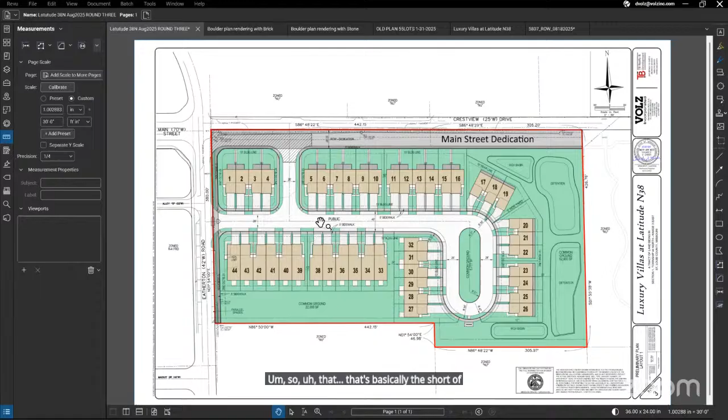That's basically the short of the plan. The right-of-way is 40 feet. The pavement is going to be a standard 26.1 feet wide with sidewalks on both sides.

I'm going to let William talk about the structures that are going to be built in the renderings that we sent. But did you have any... you know what, I'll let William talk and then we can answer questions. Thank you, go ahead William.

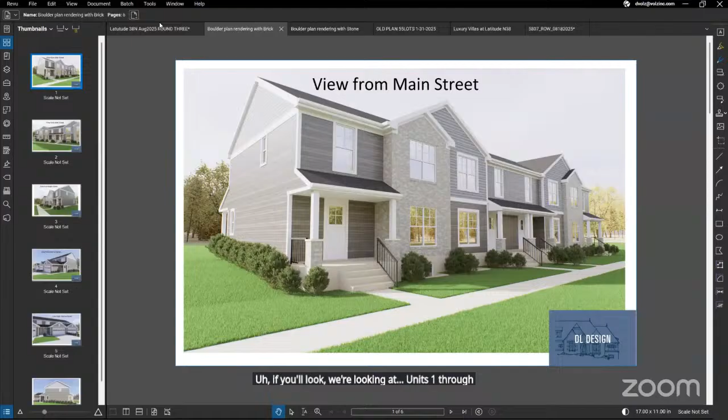Good evening, everyone. Thank you for the opportunity to show you our revised and updated plans. We're looking at units 1 through 16 on the plan. So if you were standing on what could be a future Main Street and looking south, this is what you would see. We took into account the town center design manual preferences, elevated porches, rear entry garages, etc.

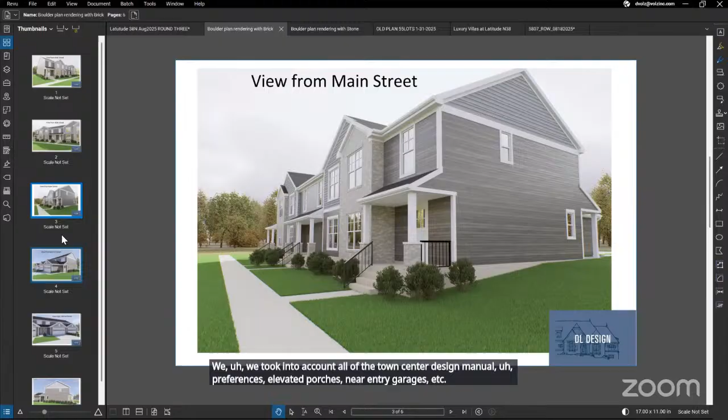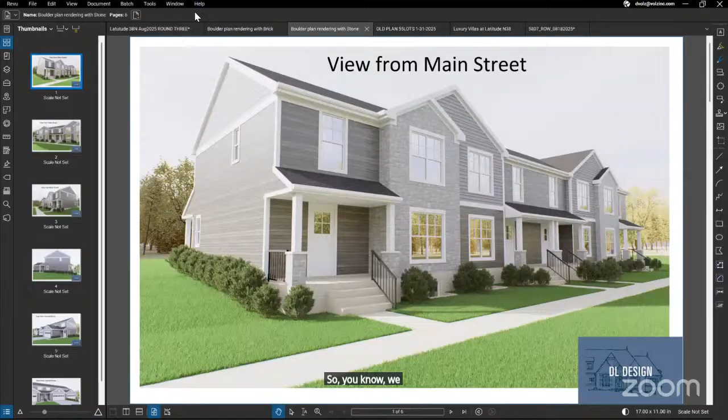We have stone and brick elevations with cementitious siding, as well as some shake materials up in the gables. We do recognize that the city has an architectural review process, and we know we'll be going through that after zoning, so we're open to their comments and incorporating those. We just wanted to let you know the level and quality of materials that we have planned for these units.

This would be the view from the internal street. Correct. Internal street again.

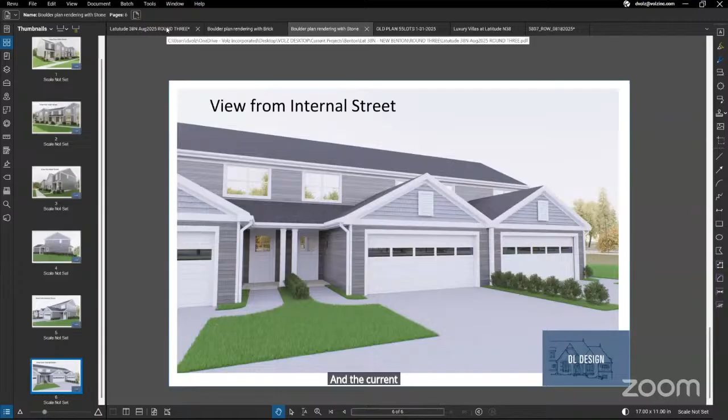The current plan has 44 units total. 12 of those are ranch units, the rest are 2-story units. The ranch units will be 2-bedroom, 2-bath. The 2-story units will be either 3 or 4 bedrooms, and 2.5 or 3.5 bath.

These would be the ranch units, 33 through 44, and the 2-stories would be these right here. Correct, and I believe these are on slab, and these have basements. Correct, and we intend to finish the basements in half of those units. How many total basements can you have, 30? It would be 32. 32, thank you.

All right, is that all for your presentation? That is all I have. Does anybody else from the development team have anything to add?

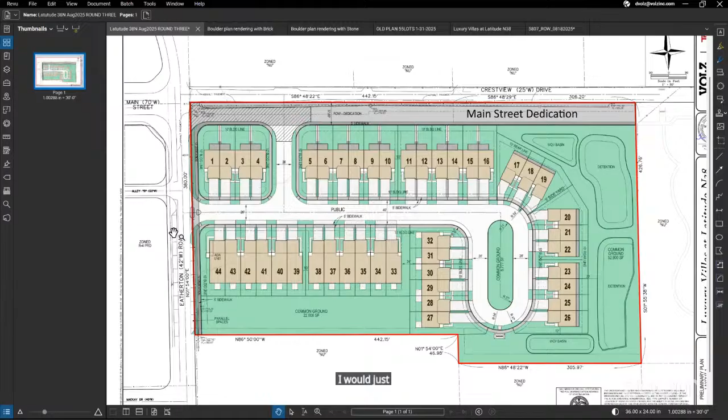I would just say that along Eatherton Road, what we're proposing is the same as what we had on the other plan, with the parallel parking spaces right here. So the design and plan for both Main Street and Eatherton match what we had always proposed, which allows a connection through to the park with the appropriate amount of right of way that you would need.

I had a question regarding whether there is a fence line along the south side of the property, between the property line and the adjacent homeowners. Last time there was a sticking point related to potential light disruption from the cars in the development, to have that fence over there. Do you guys have something like that in there?

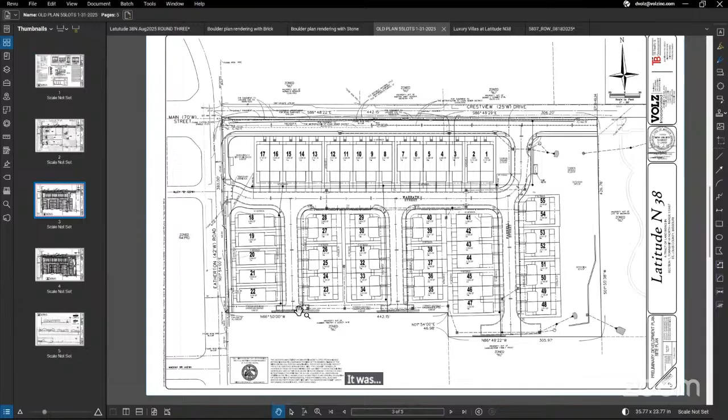We're not showing that at this point. Fortunately, there's no drives that come down here anymore, so to the south there's more than 100 foot of separation. We also will have to do a landscape plan at some point. But the need for that fence, which was basically right at the end of that stub street, if you remember, they were right here, that was so when a car came down it would block the headlights. So there's really no need for that at this point, unless the developer wanted to have a fence.

I'm just looking more over here at the Circle Drive on this end, because there'll be cars coming down and stuff like that. I'm just honestly trying to come up with, being the devil's advocate, things that I can hear will be brought up by other people. Sure. I supported the last plan, so obviously this one's even better when it comes to density and some of the concerns other people had. I think the elevations look good and the layout looks really good to me. I'm just trying to come up with things that may come up in future discussion.

Right, thank you, Councilmember. There'll be a landscape plan, and we can plant landscaping here, and you could put a little privacy fence here. It would be a short one, or just wrap this with some type of landscape buffer. There's plenty of room because this is over a half an acre over here, so you have another quarter of an acre of ground here plus all of this.

Could almost build up the land along the edge there and put some trees or something. You probably could. I do need to get this drainage down and into this basin, but you probably could do some type of a berm here.

Okay, and you could probably do a berm in here as well. We do prefer to screen with berms and landscaping, but we're not opposed to a fence. Berms and landscaping just tend to age better over time and look better, but we're open to that.

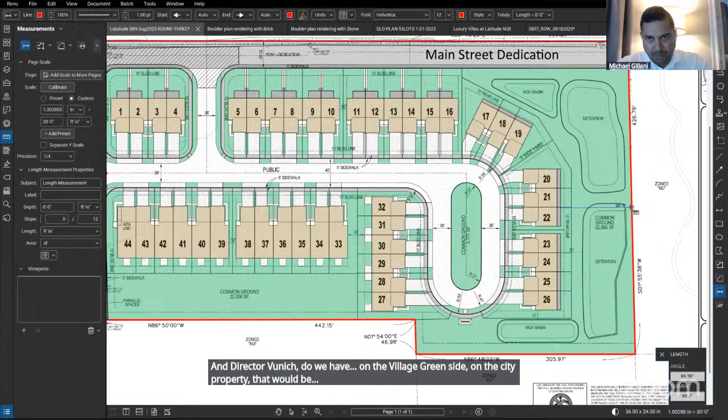And Director Vunich, do we have on the village green side, on the city property abutting the west side of this project, a tree line that's going to be in there between?

Isn't that right where the unlimited playground's going to be? Mr. Gilliani, the unlimited play facility will be just to the west of the westernmost edge of the oval. This area over here next to the development originally showed the observation tower.

But that's been removed. So for the most part, we probably have a trail network through there, but other than that we are not anticipating a lot of disturbance or tree removal there. So my point is there'll be a pretty good buffer with the trees that already exist that we won't remove.

And then potentially some trails in between. So it's not like there should be an issue there then. From the department's perspective, that's probably one of the areas where we'll have the lightest touch, so to speak.

Okay, it's probably 200 feet from the back of these units to that sidewalk right there. Yeah, so I think it's good because you'll have the oval of Village Green. I know I'm just bringing up points that people who are against it will try to bring up.

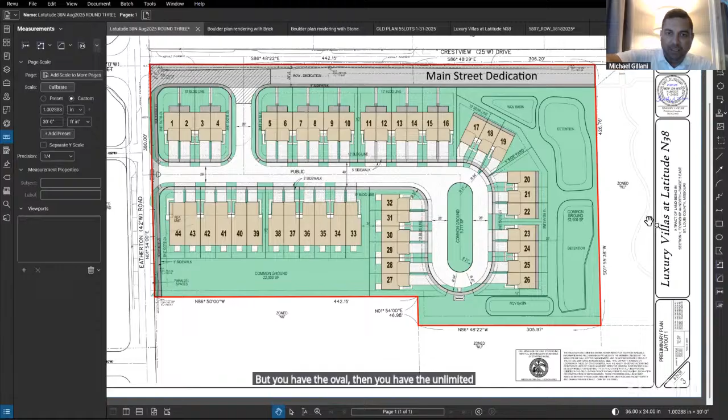But you have the oval, then the unlimited playground facility, then the tree network with potential trails, so you won't be able to see from Village Green - you won't even really see the development. I don't know what the existing trees are here, but it's pretty far away from where anybody would walk.

And like I said, we have to do a landscape plan. Previously we had a drive back here, if you remember, at one time - that's now gone. Now these are different types of units that are more shallow, which gives us more room for the detention basin. This was an entirely walled basin. So we've made many, many steps to make this a better and better plan.

Would it be possible to get a sidewalk connection from the south end of the circle over to the Village Green? You mean from here through here? Well, I was thinking the southern end of the circle. Yeah, that's just my thought, for connectivity - because if you live in lot 25 or 26 and want to go to the Village Green, you have to walk almost all the way over to Etherton and then come back.

Sure, I'm just trying to promote walkability here.

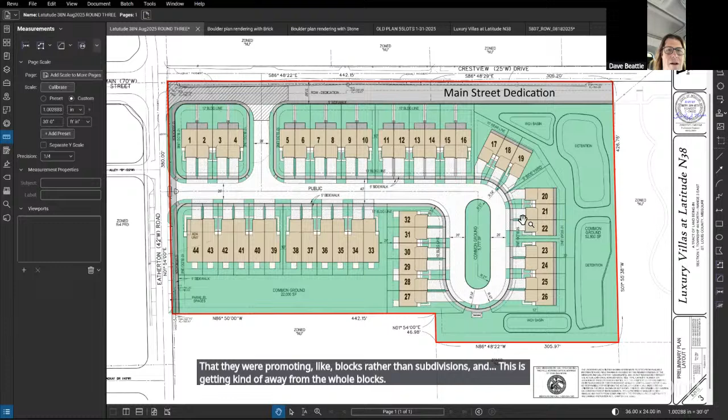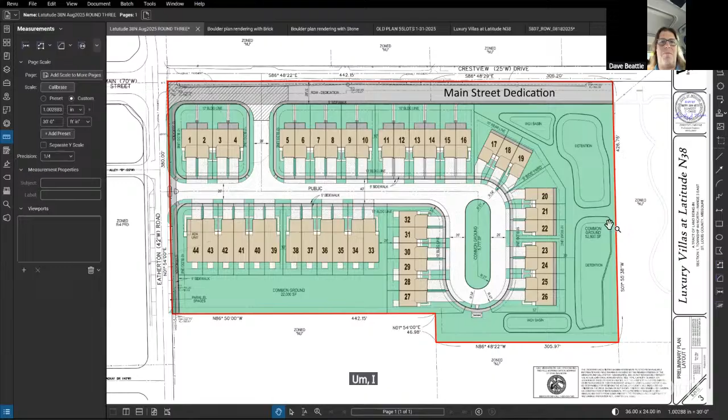Personally, I live in the town center. I liked the idea that they were promoting blocks rather than subdivisions, and this is getting kind of away from the whole blocks concept. But given the land, you only have a few properties here rather than a wide open area where you can really zone several blocks of development. And previously, I know the neighbors have spoken out against a lot of connectivity, which I don't agree with, but I'm only one person. So that's why I'm looking for sidewalks at the very least.

And then, along those lines, why is that street from Main into the subdivision so close to Etherton? Why did you put it there rather than, say, between lots 10 and 11?

Well, a couple of reasons. One, in meeting with the planning staff, this is where we all decided it could go—it could go anywhere along here. The development, I think, is going to build this much of the road. Previously our entrance was way down here, and this community was going to build all of this. But because we lost 11 units, the funding for building the road all the way down to here is gone. So this is what this community can support. That right there is about 200-some feet of Main Street. Main Street, what we're proposing, is a 24-foot drive, so you'd have a lane going either way with a sidewalk right here. That would get you to right here, and hopefully the city will build the rest of it down to the park.

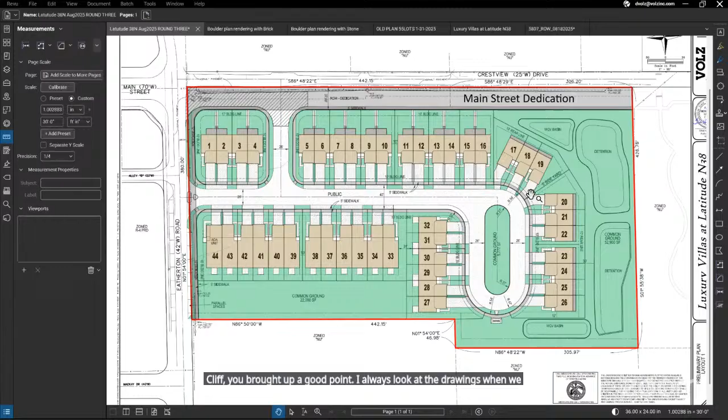That's fair. And then Cliff, you brought up a good point. I always look at the drawings when we see proposals and look at how parking is going to be handled, because that typically seems to always come up. I do see that there are 2 spaces in front of the garages, which what we sometimes end up finding out is that people don't use their garages. They fill them up with storage items, not all of them, but some, and so they use the pavement in front of the garage as their parking space. So my number one thing I'm looking at here is what happens if someone is having a graduation party on a Saturday afternoon, where are their guests going to park? And I'm looking at the street here, and I think it is 26 feet wide.

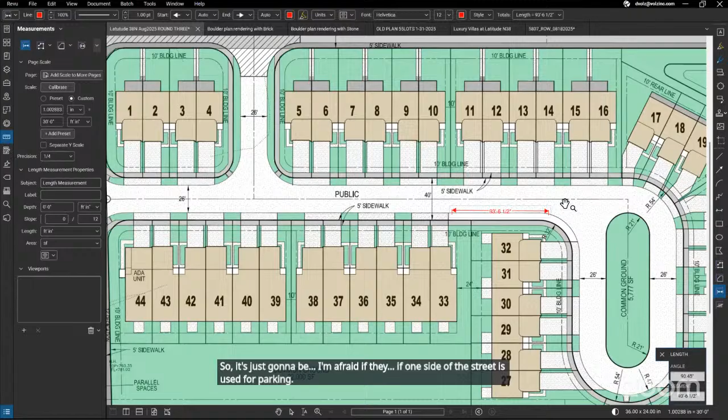So Director Vunich, 26 feet, what does the fire district tell us? Is parking allowed on that street, either side or one side, or no parking at all? Mr. Mayor, Mr. Volz described the street width as 26.1 feet in width. That allows parking on one side under the fire code. But in this instance, with the garages and driveways in such close proximity, I don't know if you'll be able to park any vehicles other than that one location Mr. Volz described, down by lot 32, and then in that elongated area. A typical parallel space is generally about 8 feet in width and 20 feet in length. So I'm afraid if one side of the street is used for parking, it's going to negate safe access into and out of the driveways.

Yeah, I think that's where I'm seeing an issue. I'm not a fan of having parking just on one side or no parking at all, because we have these issues elsewhere. So I think my feedback for you guys is you need to come up with some ways of accommodating visitors. Otherwise, you're going to have to prohibit people from having visitors, because where are they going to park?

I don't know, so to figure that out and see what you can come up with—unless you think you have an answer now. Do you want to comment on that now? Sure, I can comment on that.

The spaces right here, I think you could probably get 3, and they wouldn't be on the street. I would actually do it like we did over here, where you'd pull off and then come back on.

So I think you could get 3 here. If you can give me some feedback, do you think there's room to put a row of parking in here? Would that be something you'd want—trade off the green for the parking?

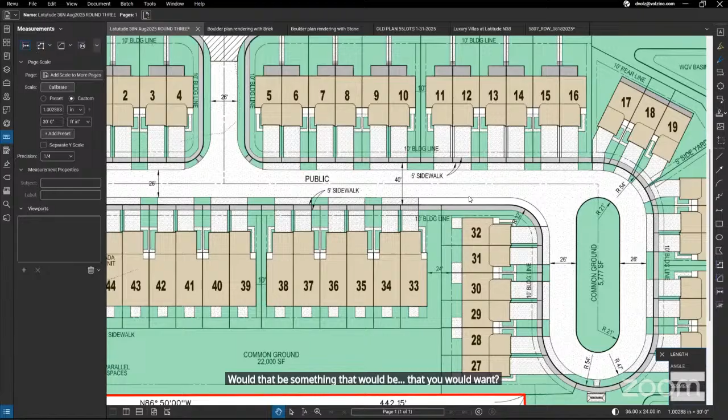In fact, you could probably get a row on both sides. You could probably get a row here and parking here. You could make that parking.

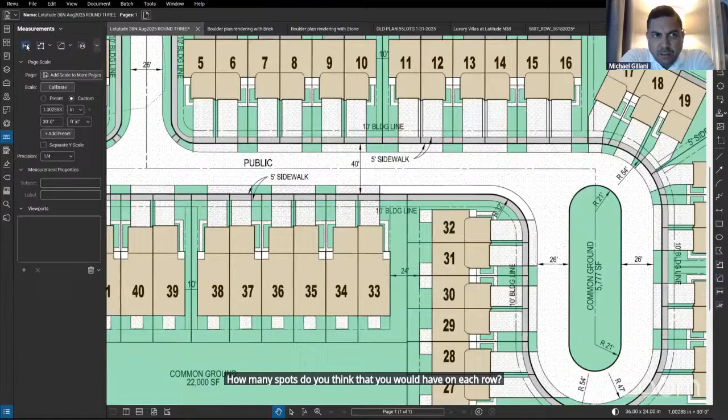How many spots do you think you would have on each row? Well, let me see here. So those would be 9 feet, so you might be able to get 10—you might be able to get 20 spaces, 10 on this side, 10 on that side.

And you're trading in then that common ground area that's in the middle. Yeah, and maybe that's too many, maybe you don't need that many. Maybe you just do it on one side.

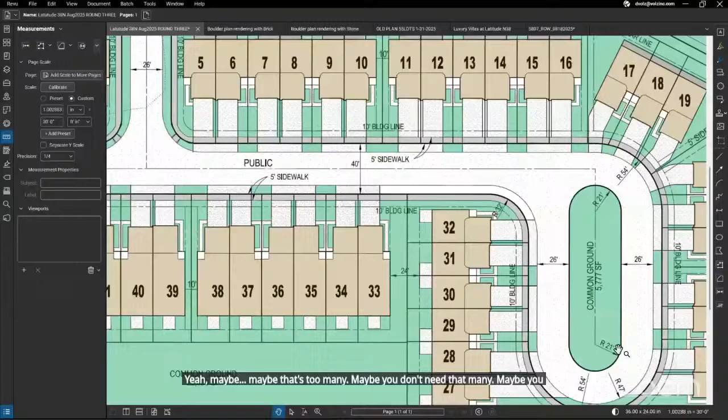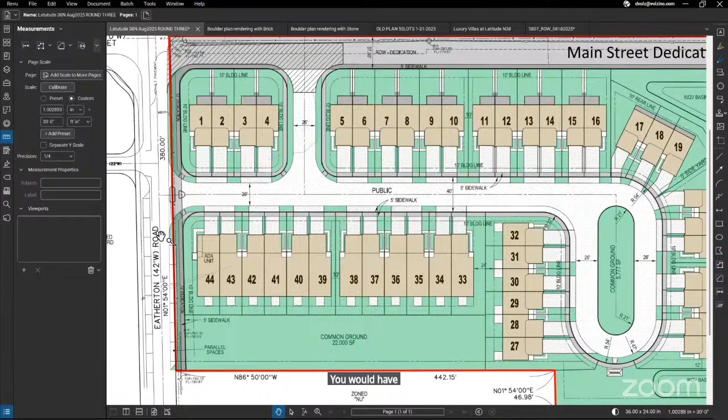And that would be the visitor parking—you'd have to let everybody know that's the visitor parking for the community. There's also parking here along Eatherton Road—I think there are 1, 2, 3, 4, 5, 6 spaces here, which probably would be available. I don't know whether these spaces on the other side are used by these homeowners, but you would have these spaces available right away.

I wouldn't want to put one here because I don't think there's enough room to come in and put one there. That would be just one off-street parking that would be in the way. So I would say you could put 3 here and plenty over here.

Well, let me ask this question, Director Vunich—don't we require a certain amount of space for a proposal? And if that were to be pursued, trading in that common ground in the middle, does that affect the space requirements that I believe we require? You follow my thinking there?

Yes, Mr. Mayor. The zoning ordinance, in terms of parking for dwelling units of this nature, requires 2 basically enclosed spaces, which are the garages. And as you noted, oftentimes those become storage units. From the department's perspective, we depend on the driveway, the apron so to speak, for the additional parking.

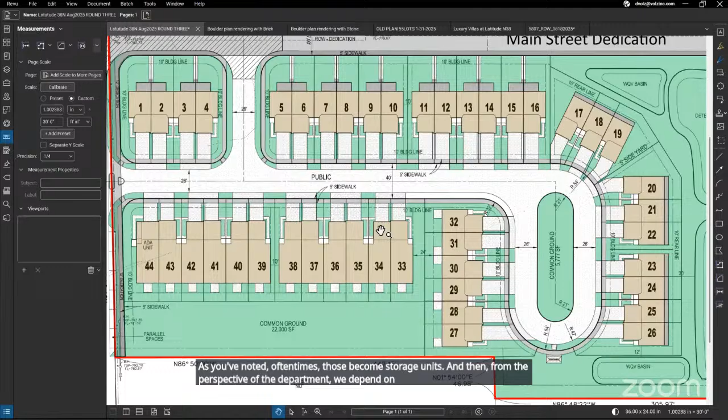Mr. Volz mentioned that an elongated cul-de-sac could be one way—we could narrow the street a little, it could go down to, I think Mr. Brown knows better than I, 15 feet. We could increase the common ground area so we could add parking and still maintain a reasonable amount of green space. Yeah, that's what I'm thinking.

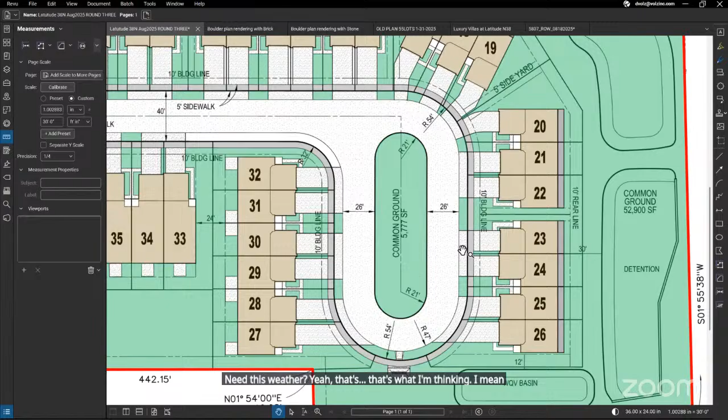I mean, I think I have to process that just to kind of see what that would look like. But I'll leave the feedback here that, yeah, I think parking needs to be figured out, because I just want to make sure that as we're proposing—and I've said this in previous proposals and other parts of the city—we can't continue to create unrealistic situations when it comes to parking.

We have that situation today. You've got it in a couple different areas. And after that, we're stuck dealing with an issue that we can't move the street. We can't make it wider. We can't do that.

And I think that needs to be just looked at there—figure out how you're going to accommodate when people have some guests over, unless you specifically put in the requirements that you're not allowed to have guests, which I don't think is realistic.

So, yes, Mr. Mayor, just a couple of thoughts. The most problematic development I think we have relative to parking is Canberry, particularly the addition that was done. That's exactly what I was thinking of. Yes, Canberry there—I know we've gotten calls over the years, and there are cars parked in the driveways and street parking there.

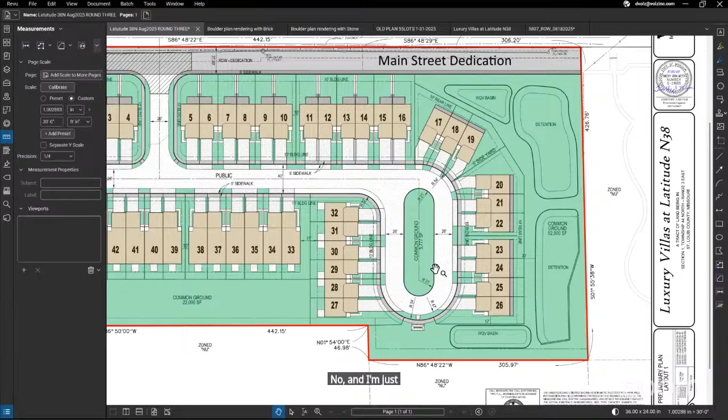So go ahead, Joe, I cut you off. No, I'm just saying what we find is some of the larger vehicles, like pickup trucks, partially block the sidewalk. And I think when we were looking at that particular project, that was coming off years and years of laying idle, with the vacant ground not being cared for well.

We were advised by McBride Homes that the type of unit generally is for empty nesters or single professionals, generally not as many families. So I think part of the discussion on this project is what demographic would be interested in renting these units. Are there a lot of families with teenagers? Are there a lot of visitors to these units? We need to balance the parking against the demographic. We've required additional parking outside the units because of circumstances we discovered in Canberry and a couple other locations.

So your point, Mr. Albers and Mr. Mayor, is well taken. Thank you.

My question is, Director Vunich just started referencing it, but what's your plan? What are you marketing this towards? Who is your target audience? Tell us a little bit more about that. Will, can you address that?

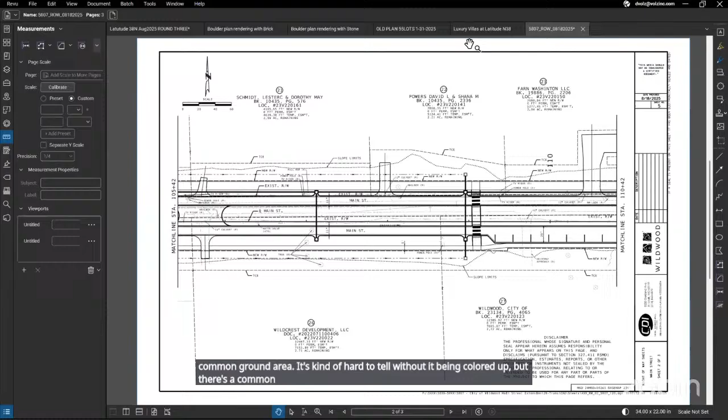Sure, can I address that? Sure, yep. As you know, here's the plan which you had sent to us—it's basically two lanes, both directions, and I think this is a common ground area. It's kind of hard to tell without it being colored up, but there's a common ground area in between. It's a great plan, but the problem is, I believe, and correct me if I'm wrong, that you need the right of way from the north in order to make that happen. That could take some time because I don't think that right of way is in place right now.

So what this is, you can call it an interim plan, you can call it whatever you want, but it gets you a 24-foot piece of pavement without having to get any right of way from the north. And it allows you to get your road from Main Street all the way through the city park and all the way to city hall.

I think I see what you're saying, what your plan is, and I would call that your ultimate plan. But I think that's a long ways off because I don't think you have the right of way or the funds to do it, but maybe I'm wrong. But doesn't that require getting the right of way from the north?

Well, it does, but as I sent you, we have right-of-way plans that'll be completed within the next month or two, and I think we have funds for right-of-way acquisition in our budget for 2025. So I think what I'm trying to tell you is that's the path we're headed on, unless council tells us otherwise, that we can be in a position to acquire easements and move forward with construction of Main Street. I think that should be the plan, to try to incorporate it essentially as best we can with your schedule potentially. And I think that's actually quite feasible.

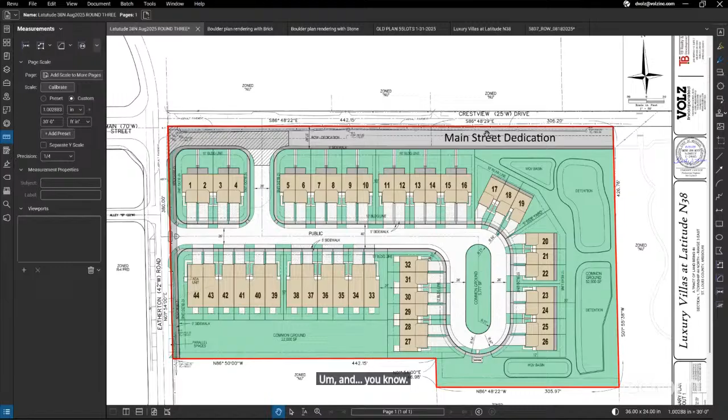And you know, if you want to build something different, I don't know what to say, Rick. Well, I think we may need to meet and kind of talk through this further, but I think we can certainly hash it out, but it probably does require a little further discussion.

I mean, that would be fine. I would love to do that. Like I had said previously, you can put this access road anywhere you want. But the further you put it down, the more of Main Street that you're building that doesn't match your ultimate plan that you would like. But I'd like to hear more about your timing and what you have in place to do that, because it appears to be a long ways off after the McBride people fell off.

Well, if you don't mind, Chair, if you don't mind if I jump in here. Go ahead, Mr. Lee. Thank you. Just wanted to note too that we do have monies budgeted for the project. We would require right of way on the northern side.

That said, when it comes to getting the project done, I'm seeing it's you said 24 feet of pavement up there, Mr. Bowles? Correct. So in that case, is there a way that could be cut in half and then you'd stretch that downward towards the east? And then we would be building towards our original plan, the ultimate plan, I guess, and at least building out that eastbound lane.

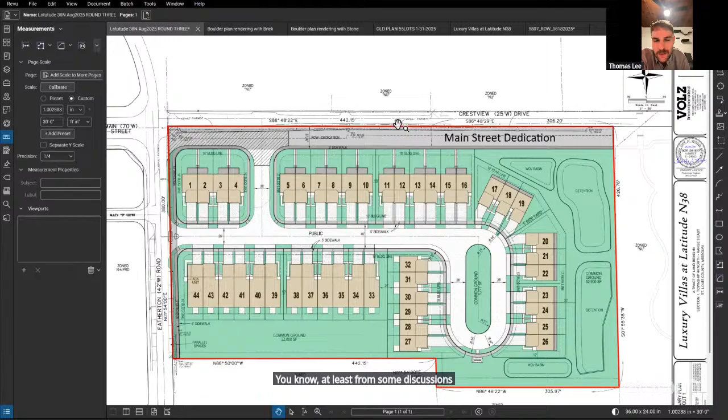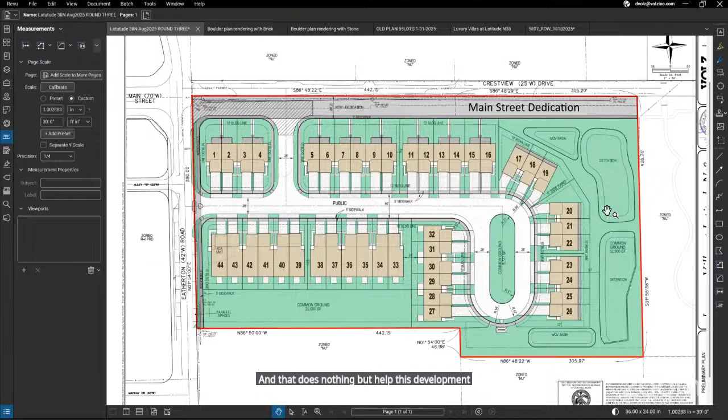I think, from some discussions at the most recent economic development meeting, it seems like the council's very adamant about getting something with Main Street done, especially with the playground going in, proposed playground going in as well. It just seems like we're going to have that issue, and we're going to have a lot of traffic coming that way. So there's going to be a push, I would assume. And that does nothing but help this development. That's why we want to give the 37 feet. We want the road to go through.

All right, Councilman Marshall? Yes. Two quick questions. I would agree with the mayor. I think you need to get your sidewalk away from the water retention and back up to the sidewalk, so you don't have kids getting strayed over to the water retention area. As nice as those are supposed to be, kids love to go in there and try to figure out what's going on. So with the park being there, I would try to get a walkway back up to get onto the Main Street walkway instead of any kind of cut throughs to the park.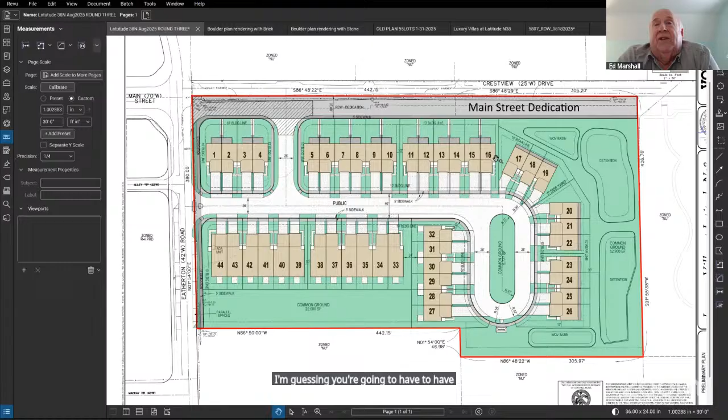The second item is, and this only happens because the U.S. postal system won't deliver to these individual houses, I'm guessing you're going to have a kiosk for your mailboxes someplace. That is true. And I think that's what we're showing right down here. So once again, across the street at Brightleaf, where the mailboxes are, there are also parking area there. I don't think the postal system will do anything as far as home deliveries anymore. Everything they're doing now seems to be in the kiosk. So just to see if that's where it is and that's big enough for everybody, that's great. Those were my questions. Thank you.

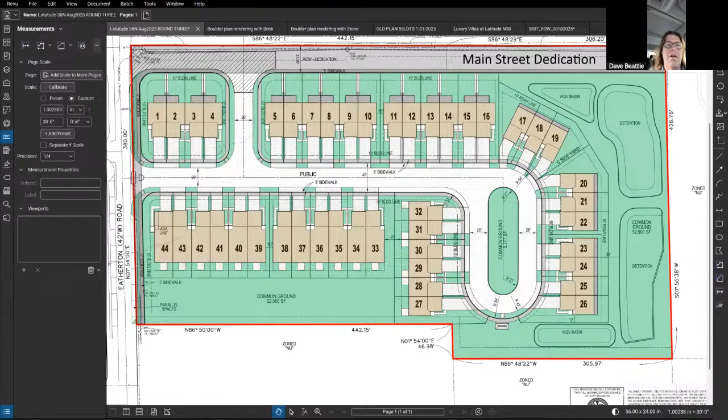Thank you, Councilman Marshall. Mr. Bosworth? Go ahead. Can you hear me all right, Dave? Yeah. Okay. Sorry about that.

That's great. My major concern, or my major point where I raised my hand, was Main Street. We have now been on probably 5 different versions of this plan since 2017. When our first November 17 Development Review Committee, we were actually the very first Development Review Committee project. And Main Street has been a perpetual problem.

We have this project, as we show it now, trying to provide, as you guys know, from October of 2023, an interim plan for your Main Street, not our Main Street. We are eager to participate. We are contributing a large sum of money to the ground to contribute it for nothing. We do not need access to Main Street. It's an amenity for us. It's a nice one to have, but it's not required. The fire department doesn't require it.

If you want to do a future Main Street, we've got $250,000 allocated, maybe it's 200,000 allocated for that 210 feet we've got shown on this existing plan, we'll contribute that. But when we got reduced from 55 units to 44 units, and we expressed this when this was occurring back in December of last year, January again, and February when we got denied, the bucket of funds to give to public funding for something that's not our responsibility diminishes greatly.

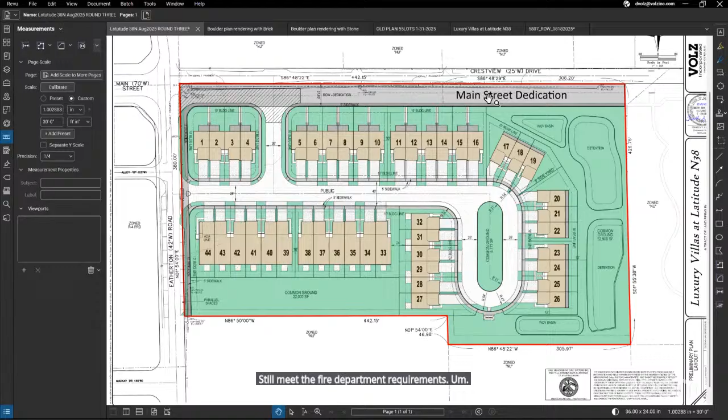Dave hates putting parking in that center island. I've always kind of pushed, knowing you guys were going to have a problem with the parking, but we've been trying to keep it a lot of green space. I think Joe, the mayor's comments were related to whether we meet the public space requirements if we turn that to parking, and we still would.

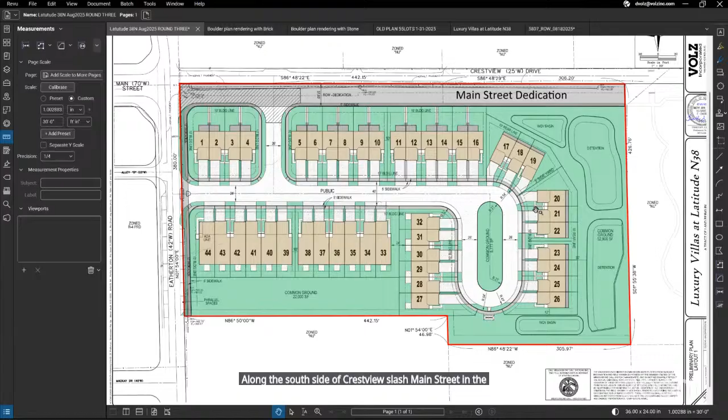We have a gross abundance of public space on this plan. In addition, on prior plans for Main Street, there was about 40 spaces along the south side of Crestview / Main Street in the ultimate plan. And in doing your modification, Rick, you have eliminated those parking spaces.

Those would be additional parking spaces under a plan from 2 or 3 years ago. It was initially drawn when you guys had 60-degree parking in front of the park ground area for 600 feet, and then we had parallel parking on our version. That was about the 2018 or 2019 version of this plan. But yeah, all these things can be addressed pretty easily.

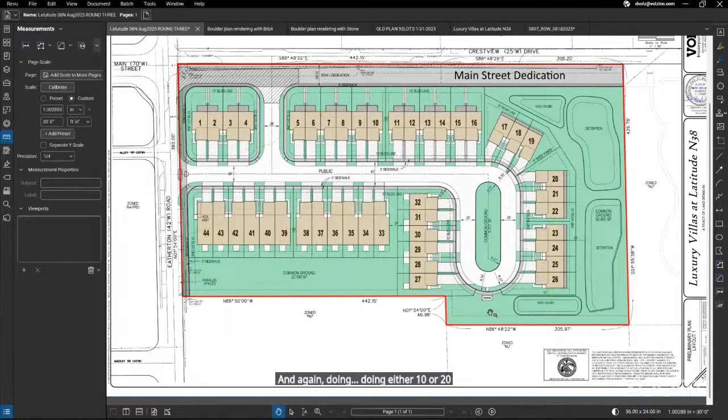That is the mailbox on the south side of that cul-de-sac. That was the intent there. And again, doing either 10 or 20 spaces inside of that circle would be a pretty easy plan. So that was the last of my comments.

Thank you, Mr. Bosworth. Is there anything else from the committee? Mr. Chair, this is Joe Vunich. Yeah, go ahead, Joe.

Thank you. From the department's perspective, when we began discussing this alternative plan, the department issued a caution to the development entity about trying to put too many trips onto Etherton Road. As you know from the public hearings and subsequent meetings at Planning and Zoning Commission and City Council, we heard a lot from people about the condition of Etherton Road in terms of its width and lack of pedestrian facilities. That is why you see that right in, right out on Etherton Road. The intent was to try to force as many trips as possible onto Main Street and then through Main Street Crossing, which is designed to accommodate a certain amount of traffic greater than the existing Etherton Road.

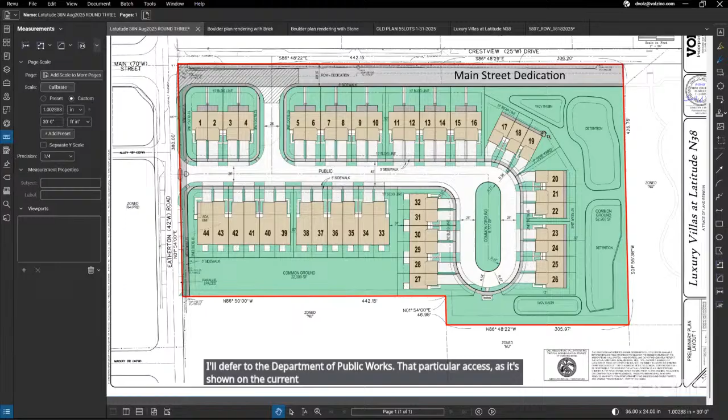Certainly where that access point on Main Street is, I'll defer to the Department of Public Works, but that particular access as shown on the current plan coincides very closely to the right in, right out, and that was part of the intent as well. So there is some logic to all of this, and Etherton Road was driving a lot of it. Thank you, Mr. Vunich.

For my benefit, are there still plans to improve Etherton Road, or are those dead on the vine? I'm talking the whole length of it, not just near this subdivision. It is budgeted. It is a project on the capital improvement program. That is correct. Okay. All right.

Yes, Mr. Chair, we haven't forgotten about it, and it is something the Department of Public Works has scheduled over the next 5-year period. In fact, I think we're looking at doing some design and engineering in 2026, Rick? Well, possibly, although as a city we need to decide what the priority is and be clear on that. If the priority is to proceed with Main Street, that's going to be what we focus on, and then secondary to that, potentially Etherton Road improvements.

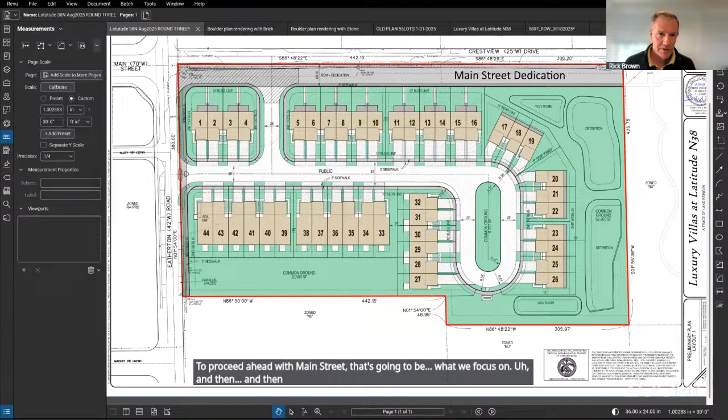Thank you. All right. Thank you. Is there any other comments? If not, I'll look for a motion to adjourn.

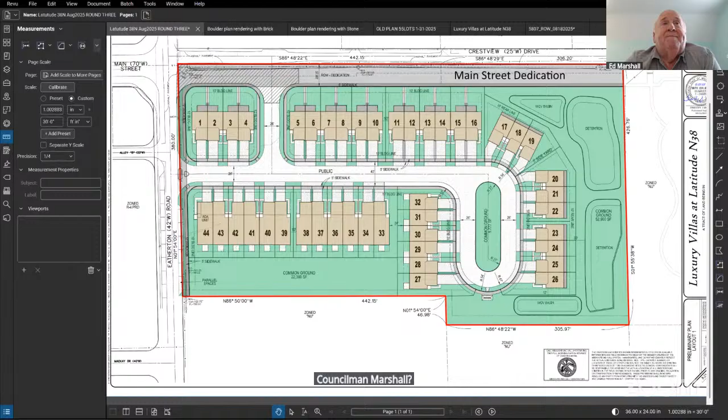Thank you, guys. Appreciate everyone's time tonight. Yes, thank you very much. Thank all of you for your comments.